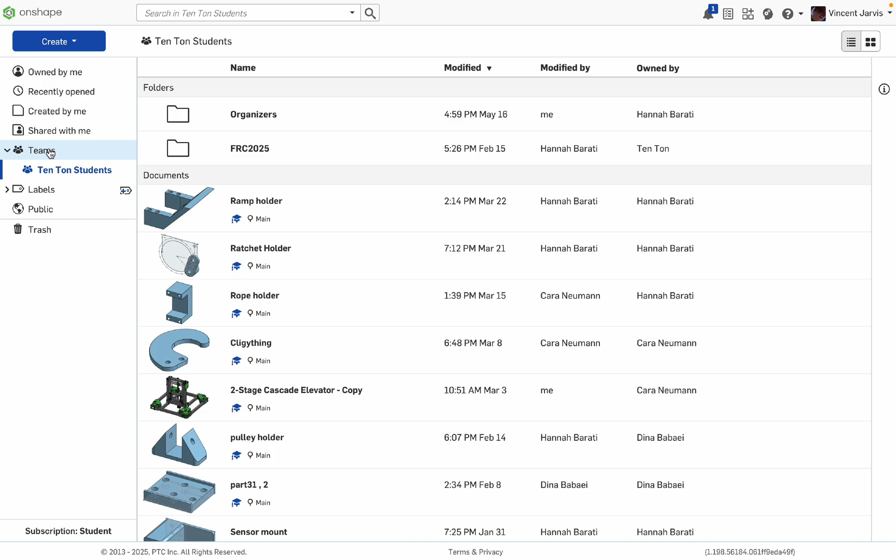This is my main page, with documents owned by me, recently opened, whatever else. You need to be in a team eventually, like the Ten Ton Students team, and we've got all these folders with various parts throughout the year. But anyway, let's create a document.

Onshape tutorial. I can totally spell, but anyway.

In Onshape we have our parts, and we build them in these part studios. Then in assemblies we place our parts and test how they work, see the joints and whatever else. For the parts we need to make sketches, then extrude those sketches, or revolve them, with all these different part tools.

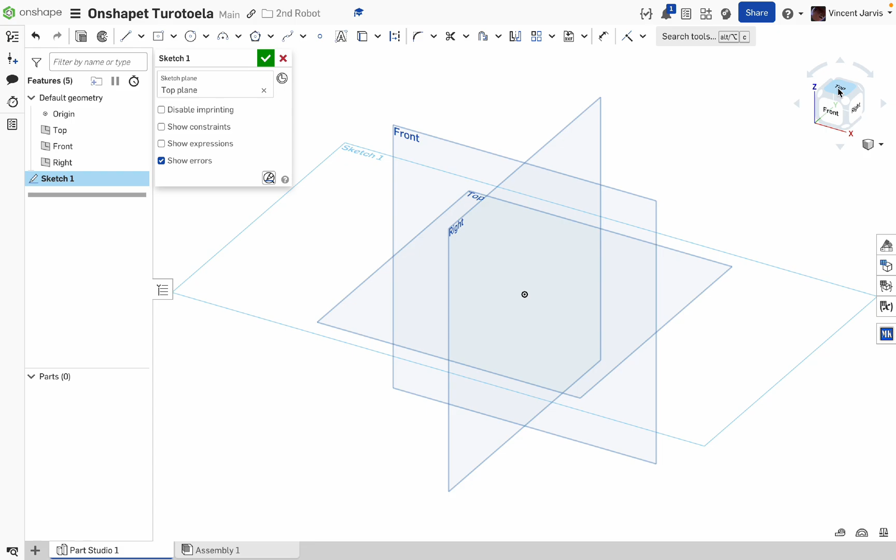So first we create our sketch. I want to align this plane. Let's say I want to make a circle, diameter 30, or a rectangle, width 90 by 40, maybe. That seems fine.

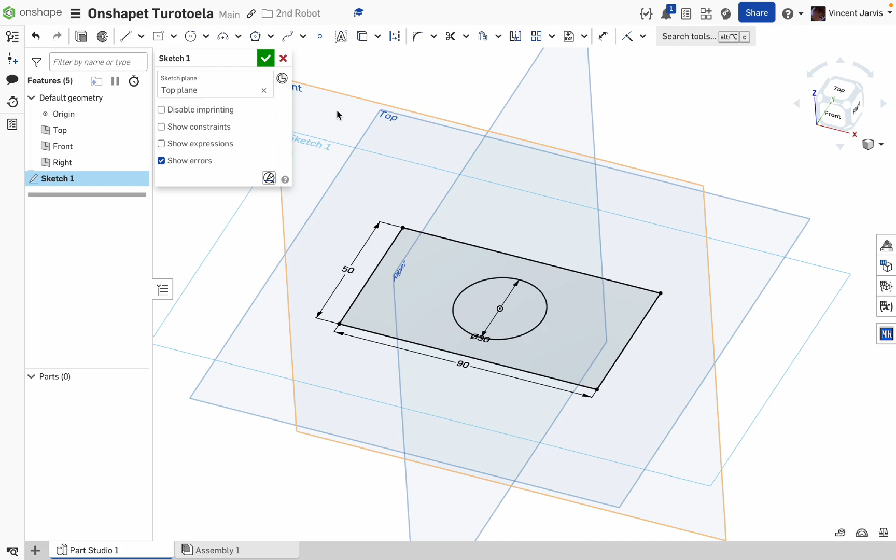Oh, actually I changed my mind, I want to change it to 50. See, I can go back into the sketch in this tab, and it saves all the changes I made there. Now I make an extrude.

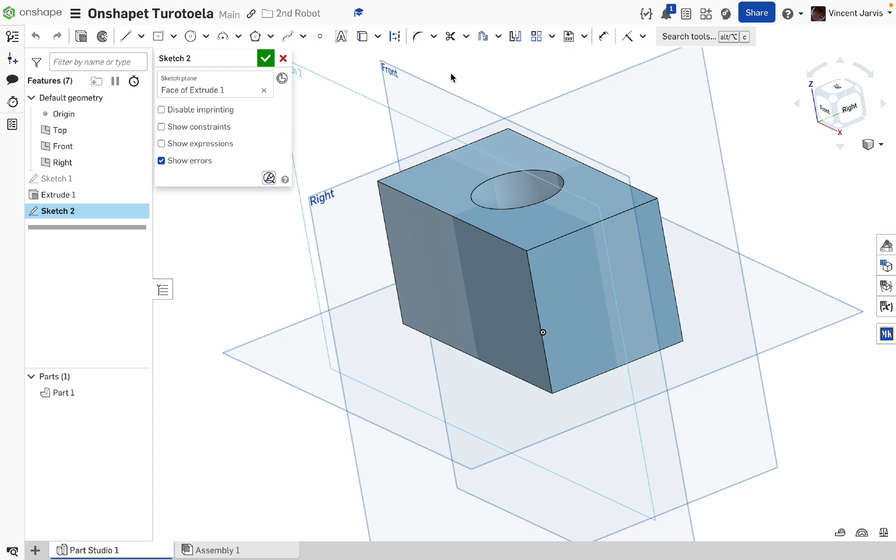Let's say maybe I want this 50 tall, and I actually want it into a triangle kind of shape along this line. I can make a sketch on that plane. So you can see the sketch I made is not on the main plane, but instead it's on the front plane there.

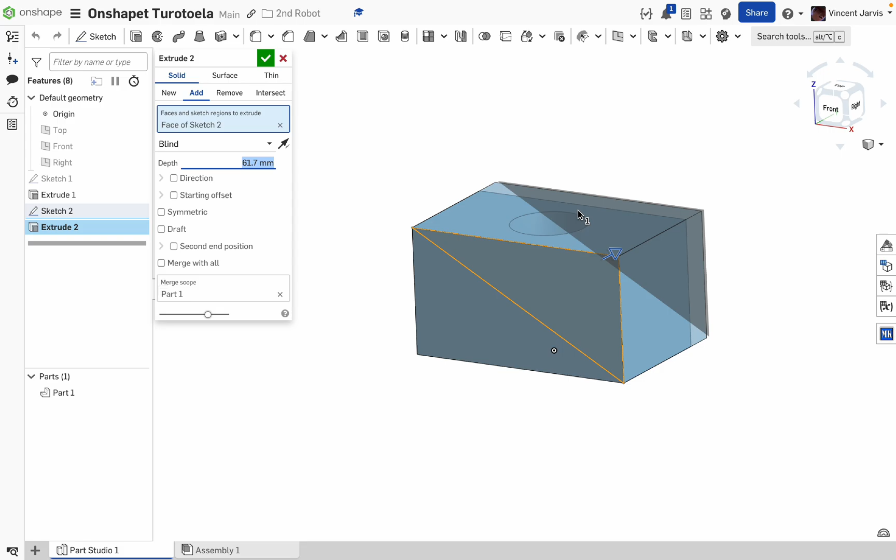So now I align myself to the front and make a line like that, check mark, and now I want to extrude that line. But the cut tool doesn't work here because I'm on add right now, so I want to remove instead. There we go, now I removed that.

Now we've got a pretty simple part. We can place it into our assembly just like this.

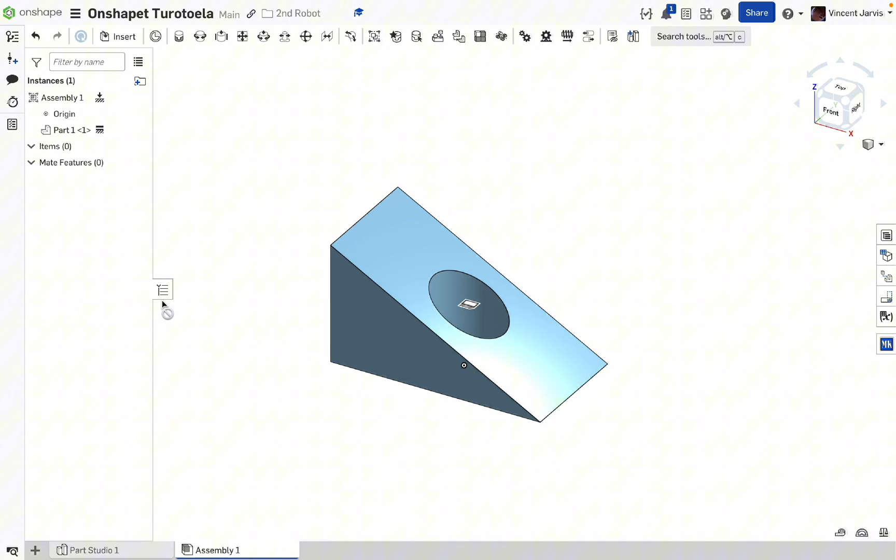So now we're in the assembly and we place it in. We can move it around however we want. Let's say we want to fix it in place, just like that. Now we can't move it anymore. We can place other things over top of it and see how those work.

But what I want to do for today is make a bolt, an M3 bolt in fact, and an M3 nut. The bolts have a head on them.

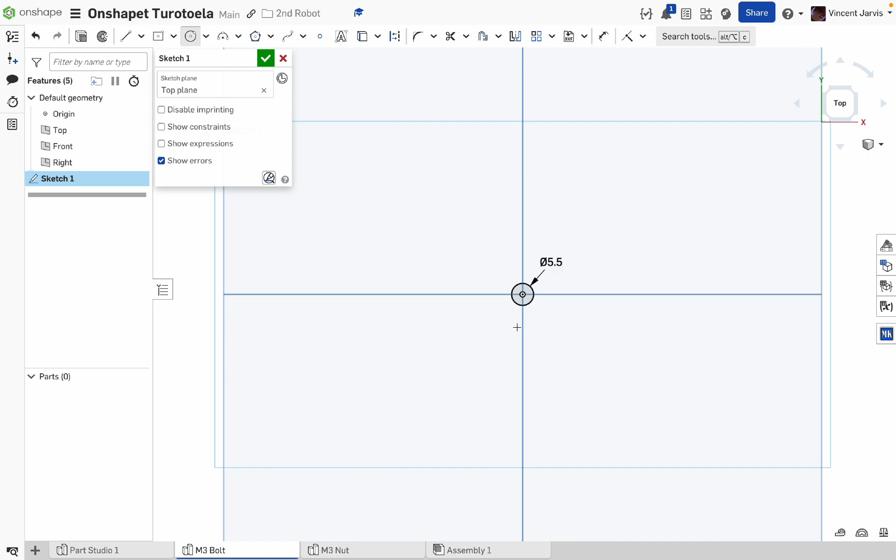Not a literal head, is that the circle? 5.5 maybe is the diameter of that, I think. And then the diameter of the inside screwy part is 3. So let's say I want this part to be maybe 15. 15 seems good.

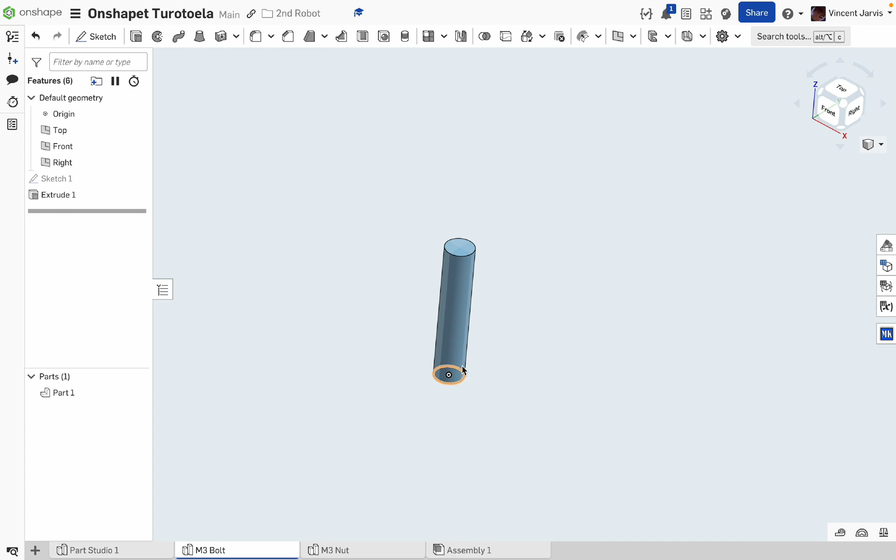Like that. But now our sketch disappeared. So instead of creating an entirely new sketch, which is what a lot of beginners do, let's just go back to the sketch and show it again, just like that. And we can click on both of those faces there, sketches there, and make a new one, make a new extrude, like that.

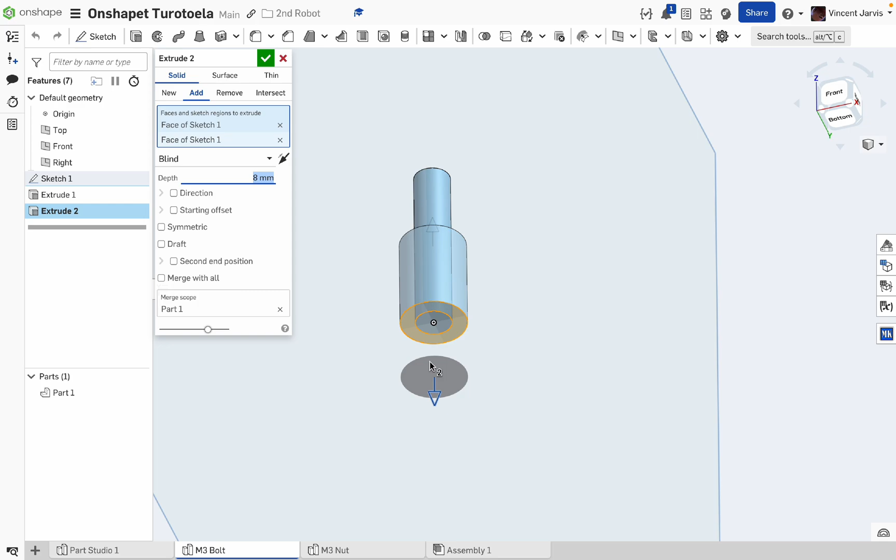And maybe that's 3 millimeters, seems about right. And now we go to our nut, let's make a nut. So let's grab the top plane again, line ourselves, circle here, 3 millimeters in diameter.

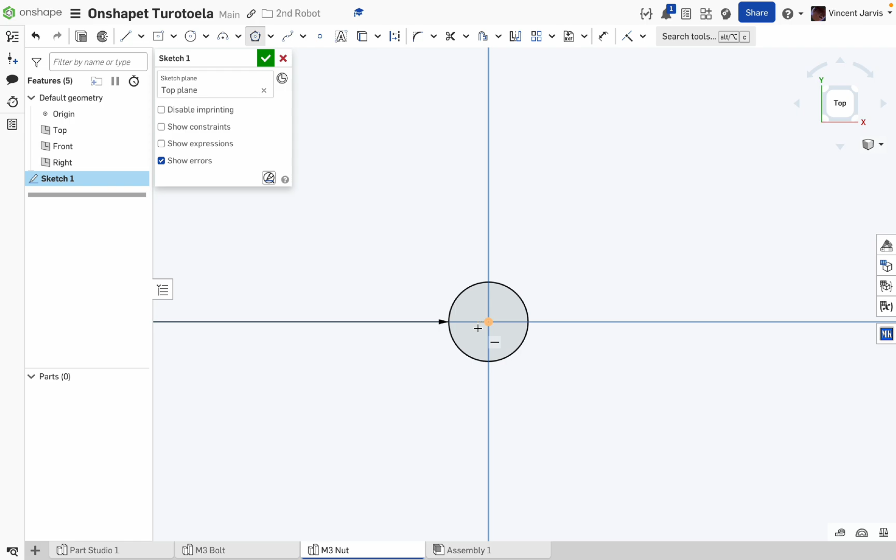Now I need a hexagon, it's a hexagon tool, just like that. And we want 6 sides for the hexagon, and then let's dimension it. Oh, where'd dimension go? Dimension it 5.5 millimeters, just like that.

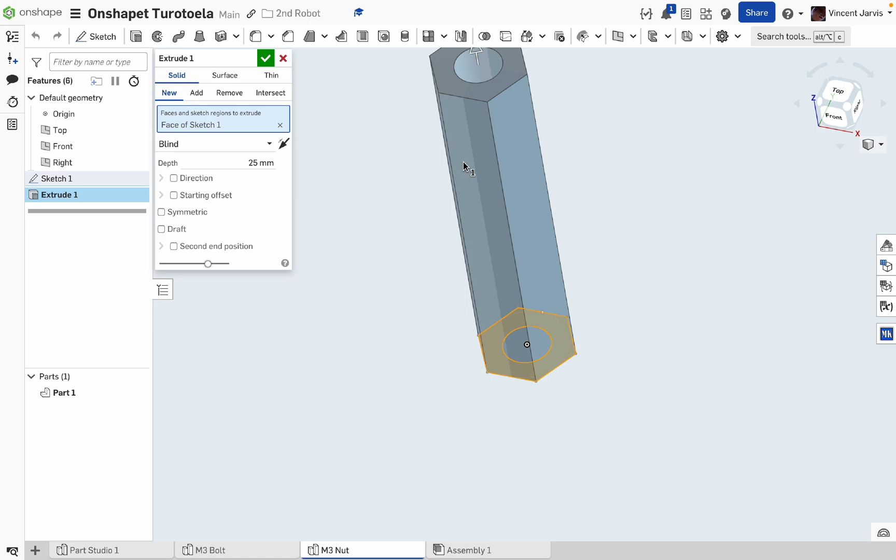And now we extrude our shape. So let's say I want it 2.5 millimeters tall.

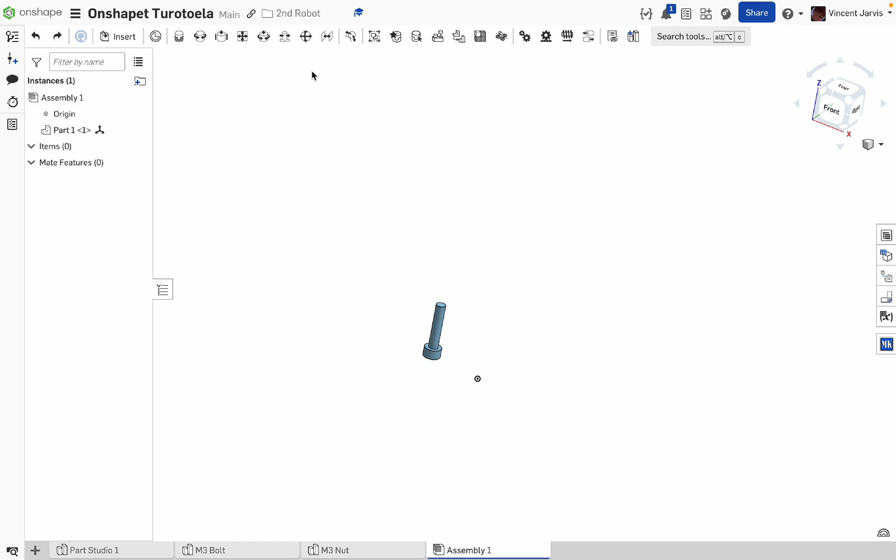And let's go into my assembly. Let's get this out of here. Next, insert our parts. We've got our bolt and our nut. Our bolt, check mark, and our nut. There we go. Great, so now we have our bolt.

Let's fix the bolt in place. And let's say I want to see how many nuts can fit on top of this.

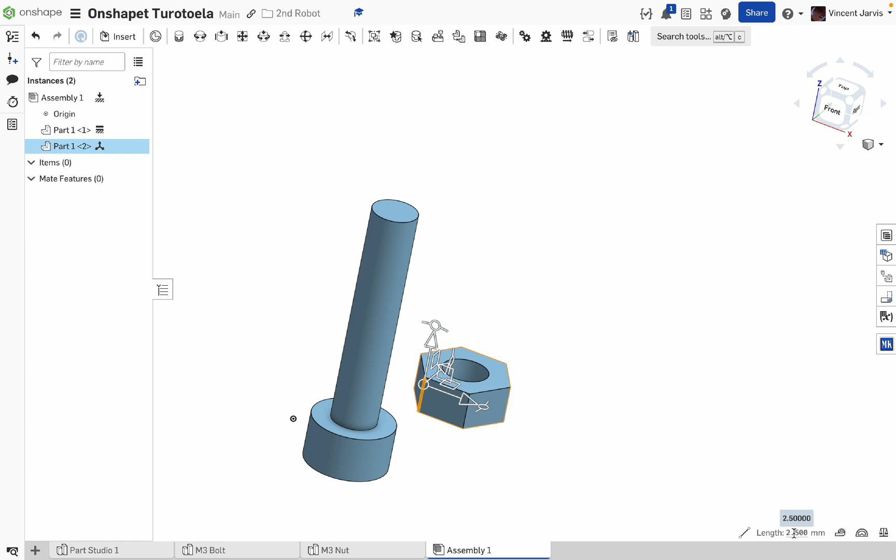I think I made this... how tall did I make this? 2.5 millimeters. We already know this is 15 millimeters tall, and we can just divide that by 2.5 millimeters, and then we can know this is 6.

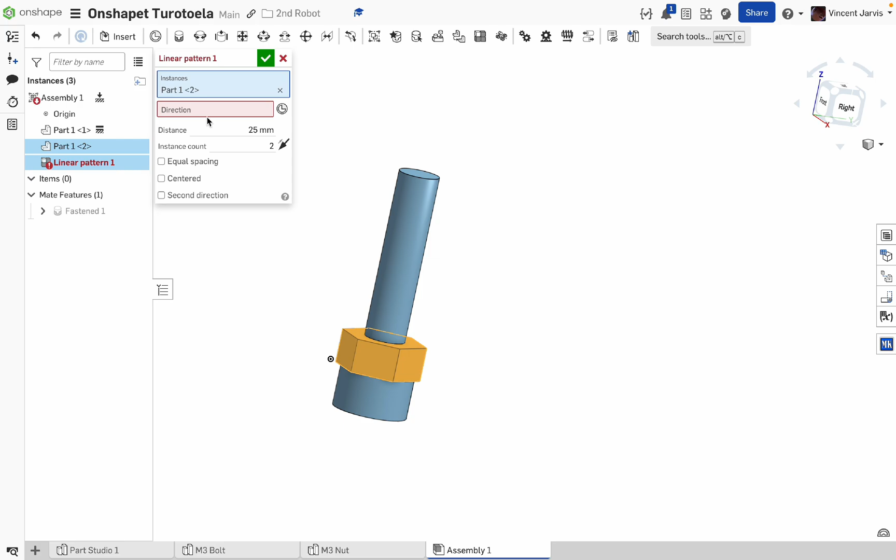But let's just say we wanted to see a bunch of nuts stacked on top of the bolt, with a linear pattern, and then direction, that direction there. Did that work? I don't know if that worked.

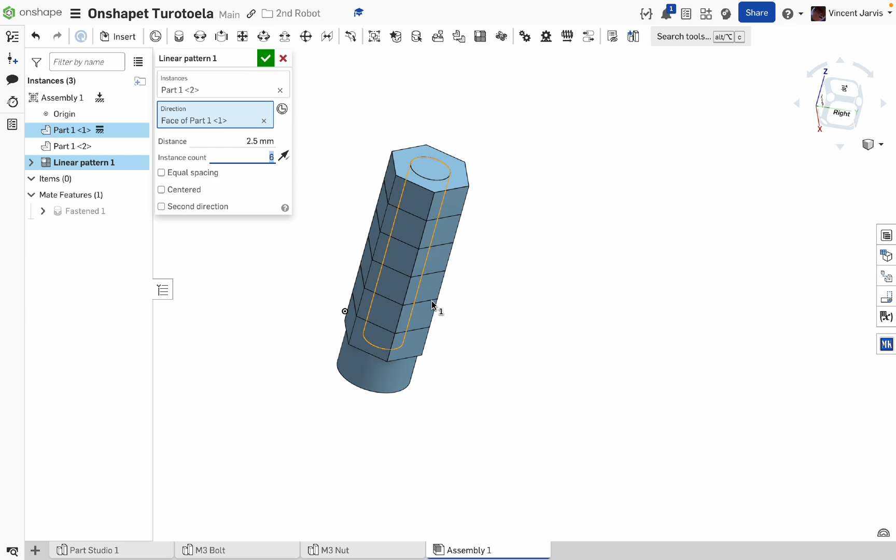That's way too big a spacing. What is that, 2.5? Like that, and let's go with 6, I think we said. There we go. So you can see it's now simulated a bunch of nuts stacked on top of the bolt.

Actually, let's simulate a connection. The slider mate - so we've got our slider, and can do like that. And now it's like on there. We can now see the nut going onto the bolt like that.

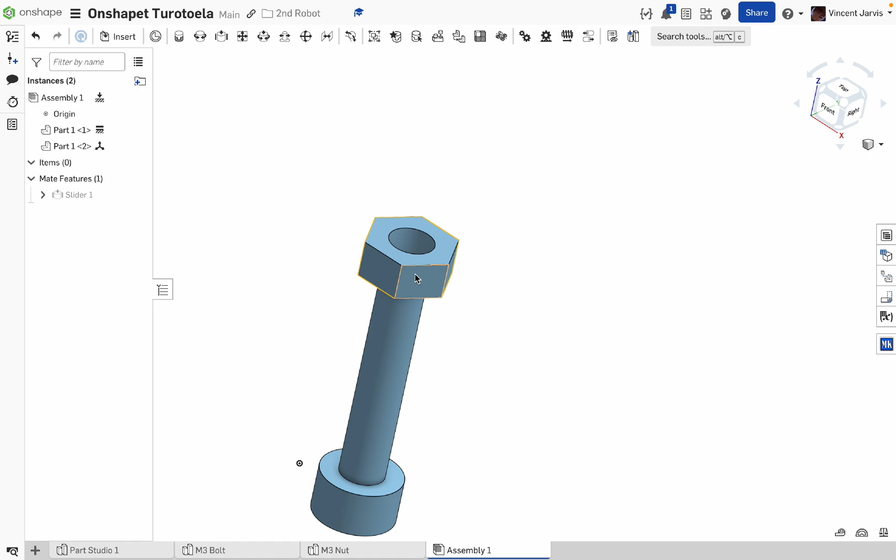But we can see it also goes through there, and that's not great. So let's change the limit - I think it's this one. So now it can only go up, and it stops right there, which is really nice.

So that's kind of how we can see how an assembly can help us. I'll show you a better example of how we can use assemblies.

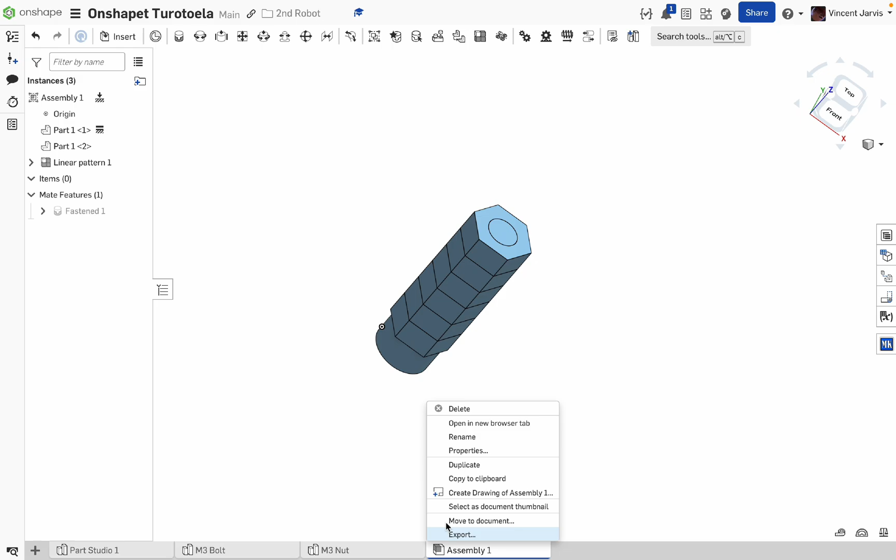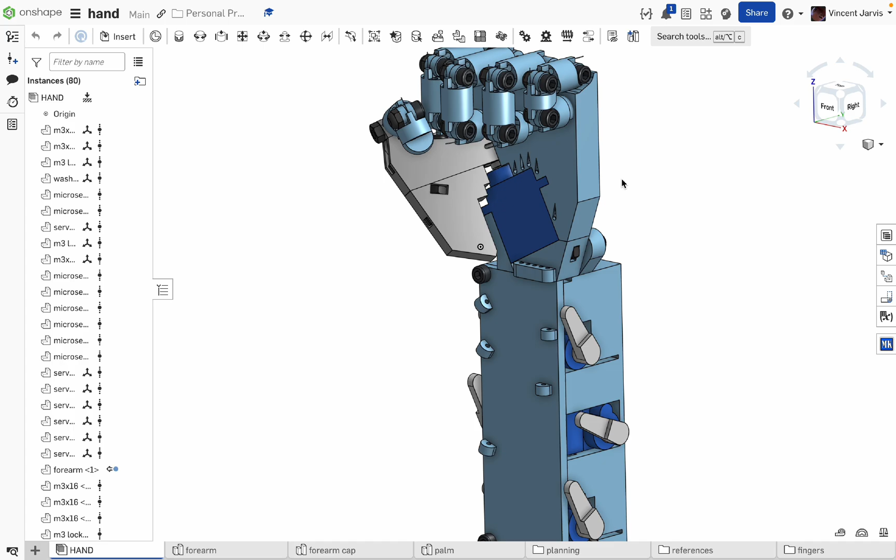So let's go in here. You can see in this kind of assembly, when we have a bunch of really complicated parts, then how they fit together - we can think about it better if we put it in an assembly, so that we can see the joints, how they work together, how far things are going to reach, and if I've intersected this part through there, so we can see how far this range of motion is through an assembly.

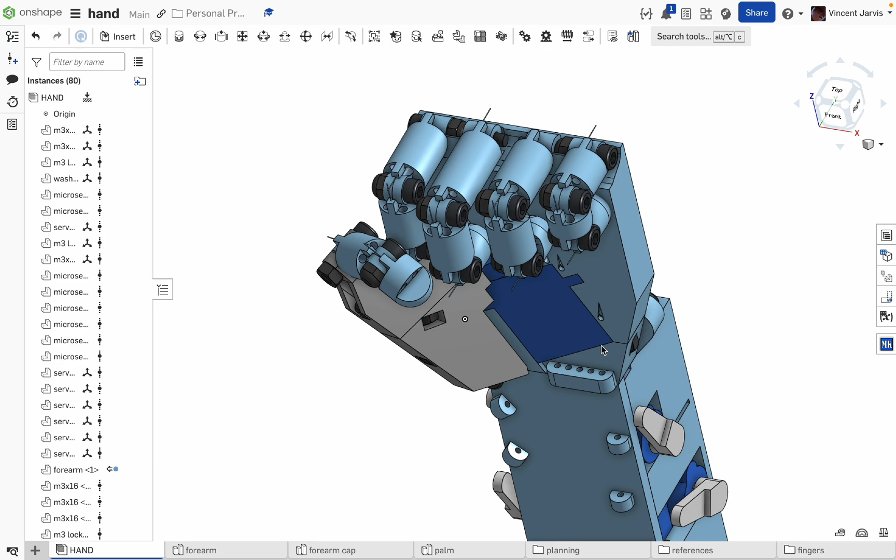Or let's say if we wanted to double check that a nut does indeed fit in here, we can show that. Or a screw fits right in there nicely - we can just double check it in an assembly. That's kind of where they're most useful.

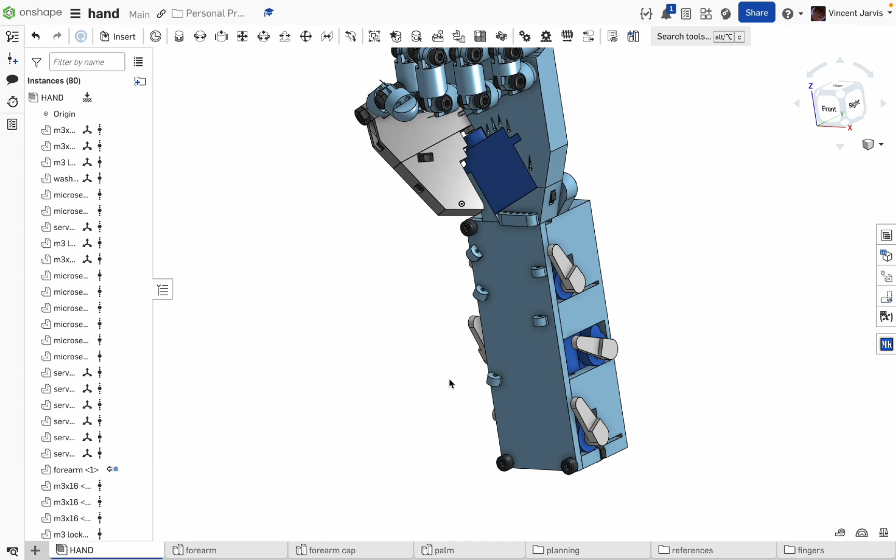And then also in assemblies, once you've made these individual parts - if you make too many parts in one part studio, it gets really annoying to make more parts. Editing this part while it's behind that other part would be super annoying. Even if I could just hide all these, it would still take a really long time.

So it's a lot better to make them and then place them into assemblies, because these part studios can get kind of laggy. You saw we made the sketches, then extruded them, got our parts, and then placed them in the assemblies. That's basically how Onshape works.